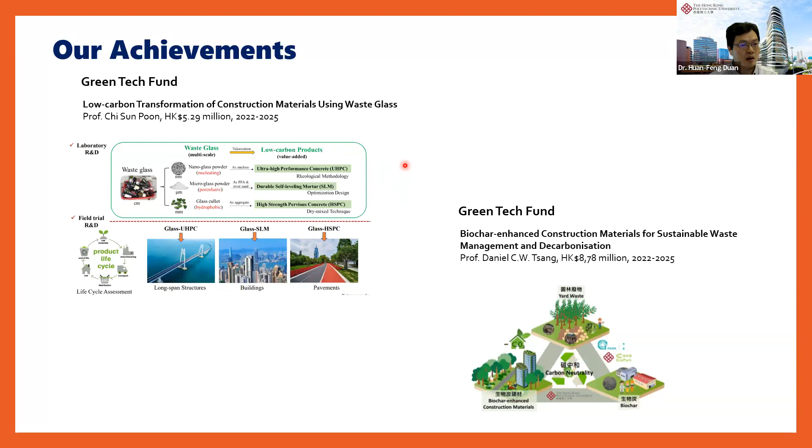We have a Green Tech Fund from the EPD to address low carbon and sustainable waste management, and also other research schemes like the model testing facility for debris flows in Hong Kong, which has become very critical due to climate change and rainfall, and the impact fund from the RGC to address drainage or material problems in pavements and other aspects.

We have different programs, like the undergraduate programs in civil engineering and sustainable development, as well as postgraduate programs and research postgraduate programs at master's or PhD levels.

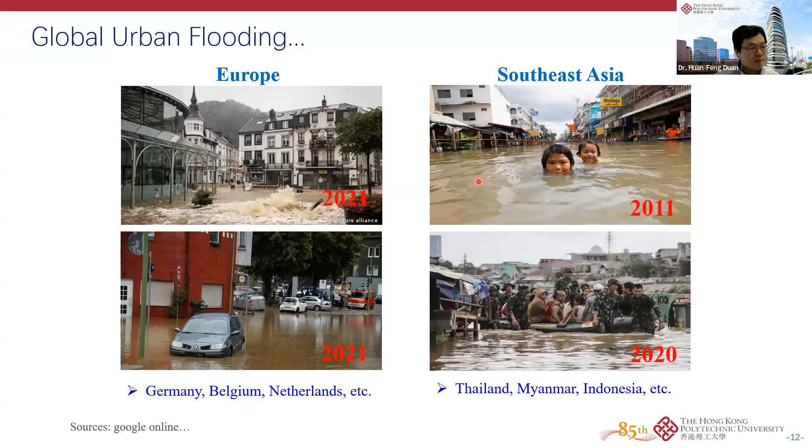And if you look at mainland China, this year Beijing encountered huge flooding events due to very heavy rainfall. It caused a lot of problems, including deaths and other problems.

Two years ago, there were serious flooding events in Zhengzhou, China. Around 400 people were dead or missing in these events, and of course there was a lot of damage, including economic and other social damage in this city.

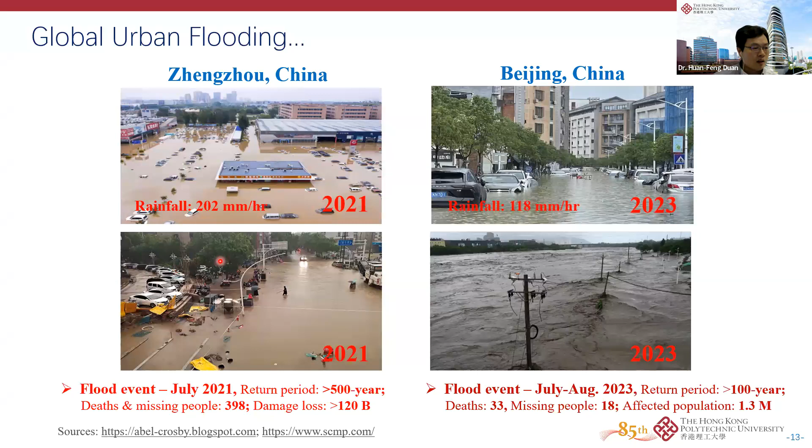Now let's see this problem in Hong Kong. Some months ago, we encountered some huge rainfall due to typhoons, which caused problems. Look at this, which occurred in September this year, just last month. We can see the rainfall distribution in that event.

It has some very important observations: the peak rainfall reached 158 millimeters per hour, which broke a lot of records from the past 100 or 50 years, and it's equivalent to a 500-year return period of rainfall intensity according to the current estimation from the HKO, the Hong Kong Observatory.

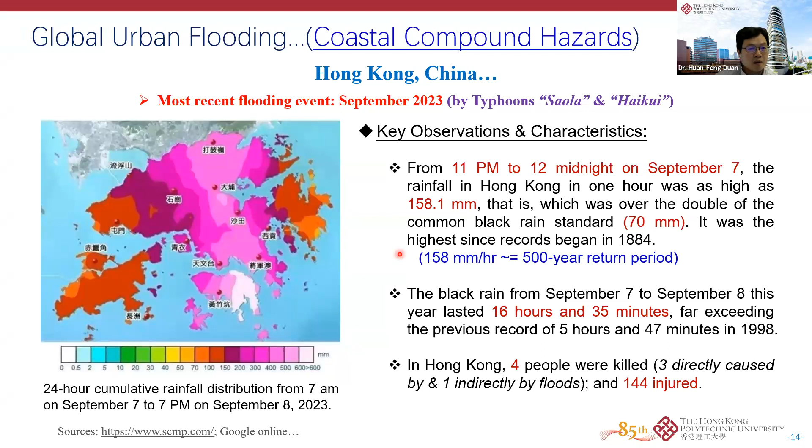And there were also a lot of problems. I believe many of you already observed that in Hong Kong, like in the pictures shown here. I'm sure you noticed or even experienced these problems in recent months. And of course, we have to propose something to solve the problems.

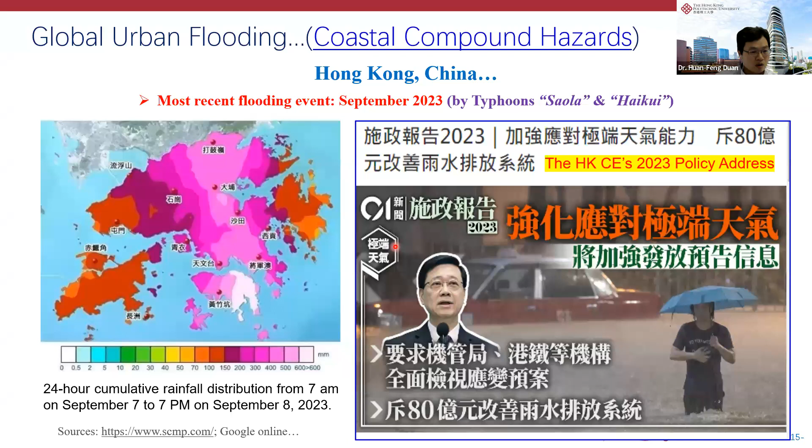Just today, I'm sure you noticed the Hong Kong Chief Executive's policy address this year already mentioned this problem, trying to improve the stormwater drainage system so as to reduce the risk and damage from extreme weather, especially due to long-term climate change. So this is the background of this topic. It has become very important and urgent for many different cities, including Hong Kong.

So now let's see the challenges of these problems through engineering and scientific research. In engineering, if we're going to construct measures or facilities to address the problem, we have to consider many aspects like cost effectiveness, the feasibility of the engineering, as well as the complexity. This is a very common way to consider it.

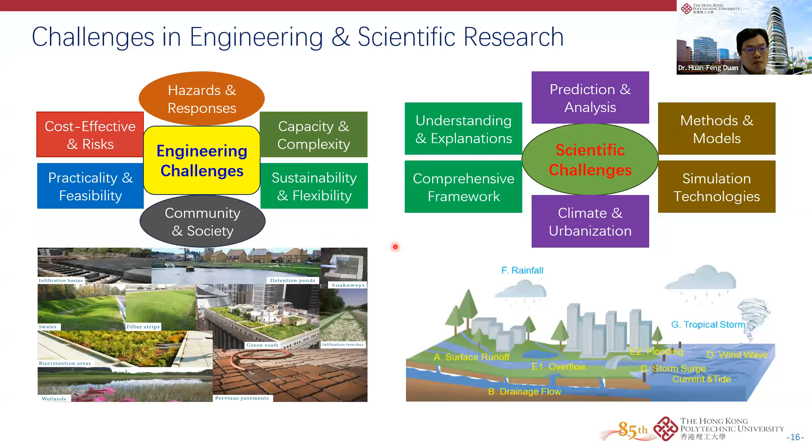From the research perspective, we have to understand the mechanism behind any engineering project and these extreme events, and propose a suitable and comprehensive framework to solve the problems. Especially, we have to consider long-term climate change and urbanization in different cities, and develop relevant tools like models or methods, including simulation technologies.

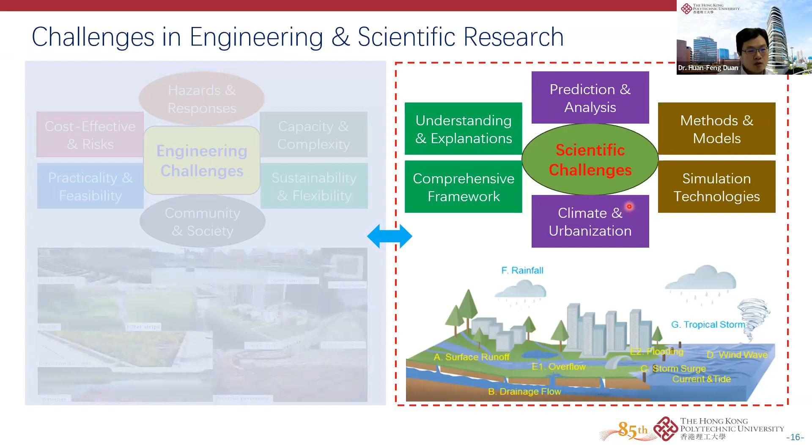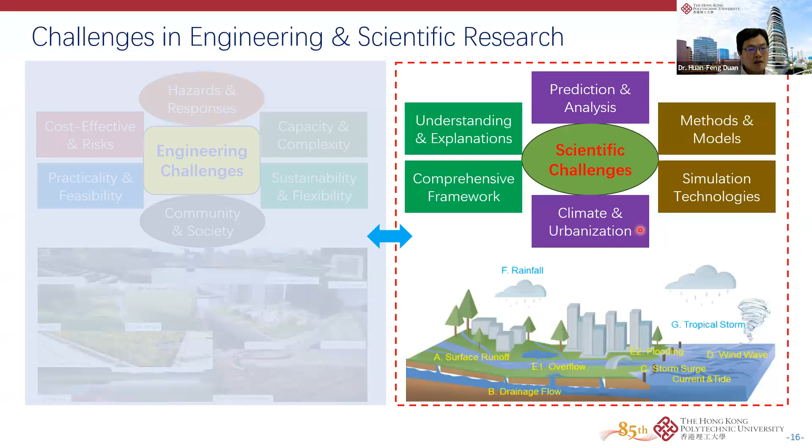According to the research in our group, we have tried to address some of the scientific challenges on this topic, including models and methods, as well as frameworks to understand and simulate the rainfall and drainage processes.

The urban drainage system, particularly the stormwater drainage system in coastal cities like Hong Kong, can be a very complex system, whether in terms of disciplines, theories, or the system itself. There can be multiple system components in this framework. It involves multidisciplinary theories like hydraulics and hydrology, and fluid mechanics knowledge to understand flow characteristics and interaction with the structures in the system or the soil itself.

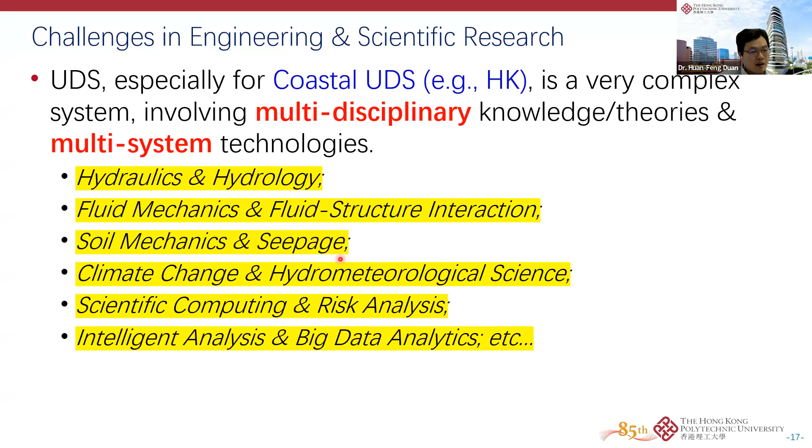At the same time, we have to consider influencing factors like the climate and weather, and propose scientific computing technology that can be used in this field. And finally, we combine advanced data analysis methods like AI or big data to propose an intelligent framework to solve the problems.

Of course, the stormwater drainage system is not only about drainage channels. It can consist of different subsystems like surface runoff, the pipe system or open channel system, the river system, as well as the coastal water system if we are a coastal city. So it can be a very complex system when addressing flooding issues in coastal cities.

So now in this presentation, I'm going to introduce some of the knowledge that will be used to explain some mechanisms of the floodings or even more extreme events during the rainfall process. And then, of course, there are many basic knowledge like the basic hydraulics, including the mass conservation, momentum equations and energy equations and so on.

But in addition to that, we have to consider more extreme cases like the superposition of different phenomena that can occur in the drainage system. It's usually one of the key reasons causing the damage to the system.

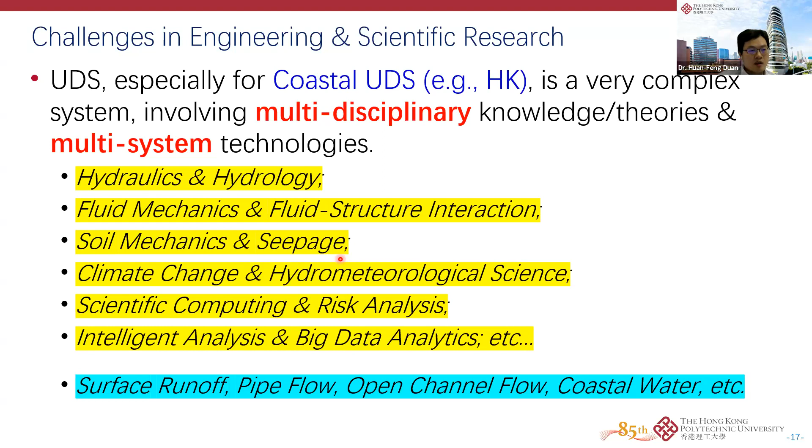So the first part I'm going to introduce is about the multi-phase flows in drainage pipes or systems, because during the very fast runoff or surface drainage, the water goes into the drainage system from the rainfall collection system, and then it may cause some multiple phase flow, like the air can be trapped or taken into the system. So the air, in forms of bubbles or cavities or any other pockets, can be contained or maintained in the drainage system and cause some severe problems under specific conditions.

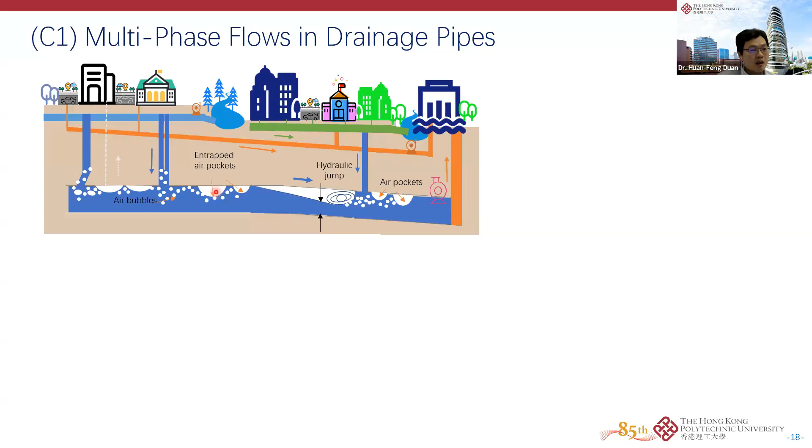Like when we drain the water from the surface into the vertical collection pipe and then to the downstream with different slopes, the air trapped initially in the system can exist in different forms, and also where it stays could be very different, like the air pockets, some maybe in the free surface, some maybe in the pressurized, and so on. So this could form very important and also difficult problems from the scientific computing perspective: the air-water flows under this unsteady state.

So in this regard, the form of this trapped air in the pipe section could be divided into different types for the investigation. There are different properties or dynamics, like the bubble flow, plug flow, or slug flow, as well as other different forms. For each of these types, the treatments from the simulation or from the physics could be different when you're going to simulate or solve this flow in the system.

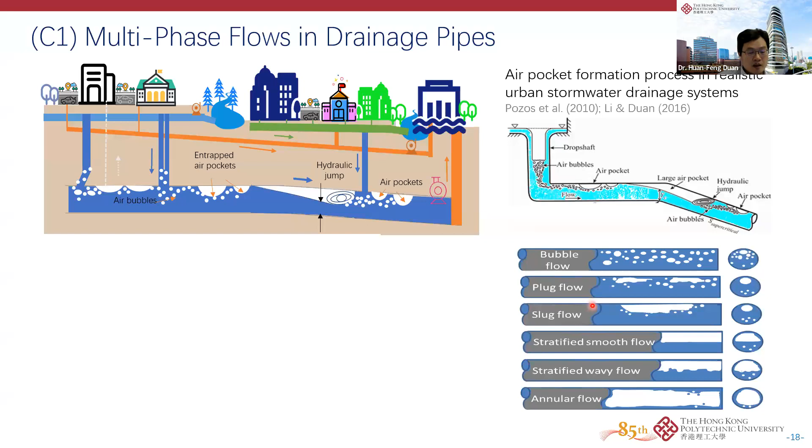Different methods should be used, because some of the methods may be applicable to solve the bubble flow, because the bubble flow could be relatively uniformly distributed, while for the slug flow, relatively separated regions in the pipe can be observed, and then you have to treat the interface clearly.

So in this regard, due to this air trapping in the drainage system, it can induce some problems, including drainage capacity reduction, as well as some extreme pressure change. So the pressure change, like the sudden increase of pressure, can cause some problems, like shown in these figures.

As an example, in this kind of drainage system, the water comes out from the manhole due to the high pressure. It could be the pressure of the flow itself, but it may also be due to the air and water interaction, especially like in the first figure. The pressure could attain over 30 meters of head. So this air inside the drainage pipe can cause very serious problems.

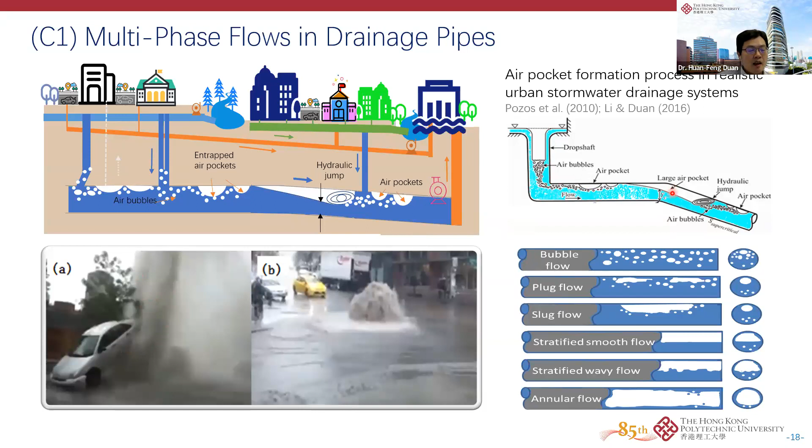So how to address this problem, how to predict, or how to model the system before we can have a very good or better design of the system? So we have done some experiments in the lab so as to understand how the air propagates under these pressurized conditions, especially under the sudden drainage or the sudden inflows from the upstream because of the runoff of

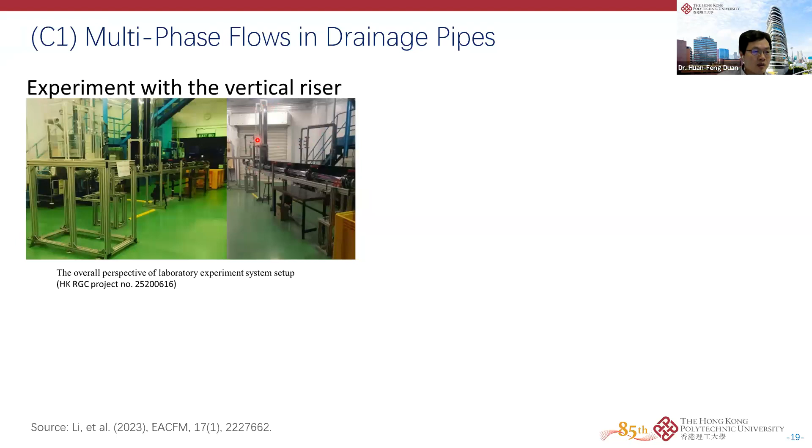the heavy rainfall. We have done different experiments in the lab so as to understand how the air pockets propagate, pressurize, or are released from the vertical risers, which are used to mimic manholes in the drainage system. So like shown here, with different sizes of the risers.

And then, of course, after these experiments, we have to further simulate this process so as to know more details, because experiments can show you some basic phenomena, and you can measure values at some typical locations, but you cannot measure all the locations or the overall picture of the distributions of the pressure and the velocities. So modeling is another useful and important method to capture the whole process of the drainage.

So we propose two-phase models so as to capture how the air pockets propagate under the different conditions. In the model, we can set up different boundary or initial conditions so that we can understand exactly the process or mechanisms in the system.

However, if you're going to use the compressible model, it seems that from the physics, it may be more reasonable. But if you're going to deal with the interface, it causes a very unstable state due to the numerical oscillations. Not exactly the physical oscillation, but numerical oscillation because of the compressibility of the air inside this pipe. So it can cause an even larger difference between the experiments and the models.

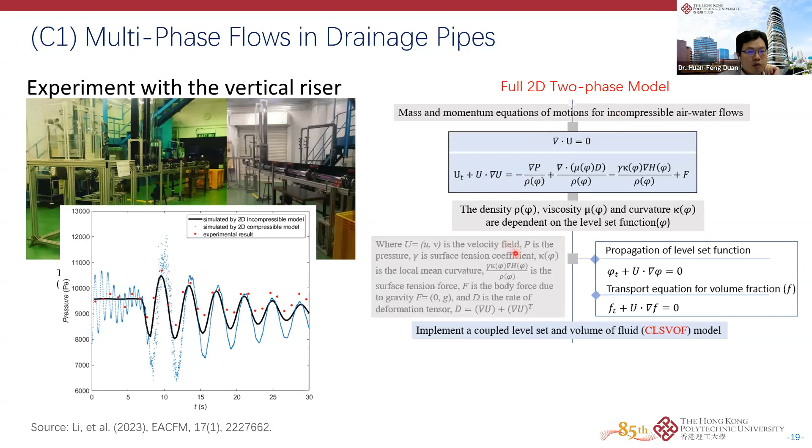So according to the proposed model we have in this work, we can actually understand some mechanism or the phenomenon of why this kind of air entrapped in the pipe can cause so much damage in the system. This can be analyzed through the numerical results from an energy perspective. We can easily understand through the simulation that in the whole system, the energy can change or be transformed among different forms like kinetic energy or potential energy. They can exchange with each other in the system due to these oscillations.

And finally, we can understand that during these air-water flows, there is huge energy accumulated under the compressed state of the air, especially when it comes to any release or releasing risers, this energy will be released to form this very huge water column like we have observed in the former slides. Okay, so it caused a lot of damage in the system. So this is the first part we have done for understanding the air-water flow, the role of the air inside the pipe. It can cause very huge energy variations during the draining process.

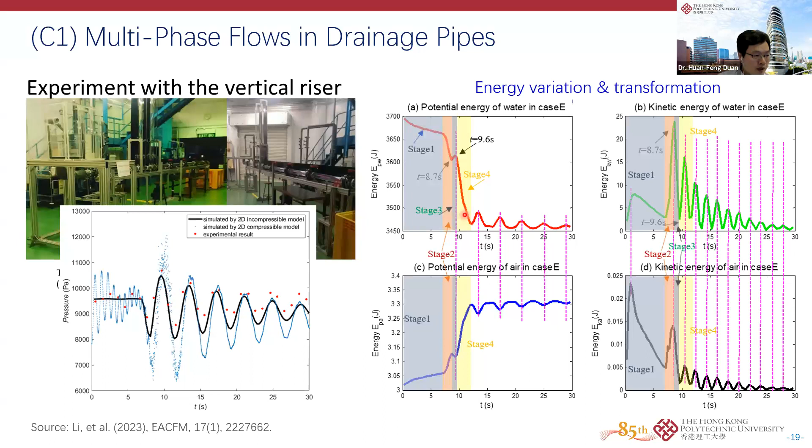And then another one is, when we are concerning the drainage in the urban system, it also concerns the channels' capacity for addressing the flooding problems. However, we have proposed a lot of developments of sustainable and renewable systems. So including the drainage channels, we usually build the channels with plants or aquatic vegetation. In this regard, it can maintain the ecosystems, but at the same time, it can cause some other problems from the hydraulic perspective, like the reduction of the drainage capacity or even sediment problems or other hydraulic problems like turbulence and so on.

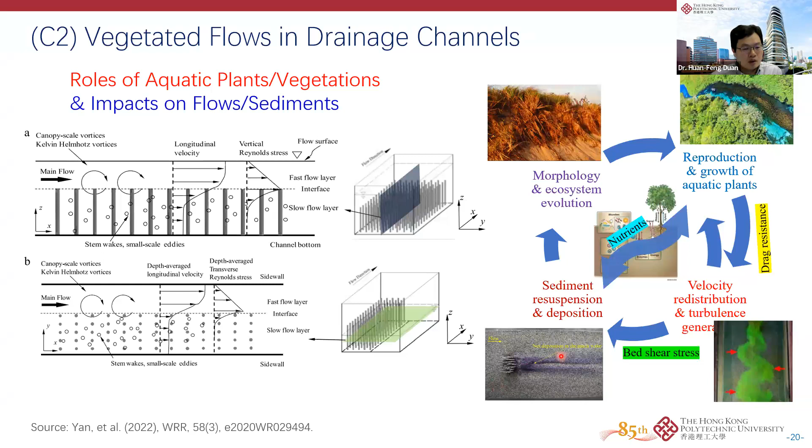So to understand or investigate this kind of vegetative flows in the drainage channels also becomes very important for the whole drainage process in urban drainage systems, because in many urban drainage systems, some parts consist of this type of vegetated channel. If you look at the vegetation's role in the drainage channels, it may be submerged in the water or emergent from the water, or partially or fully occupying the channels. So it may cause different interactions between the flows and the vegetated parts. So how do we understand, from the flow mechanics point of view, how this vegetation blocks the flow capacity or changes the velocity in different parts of the system, especially causing sediment erosion or sedimentation problems in the channels.

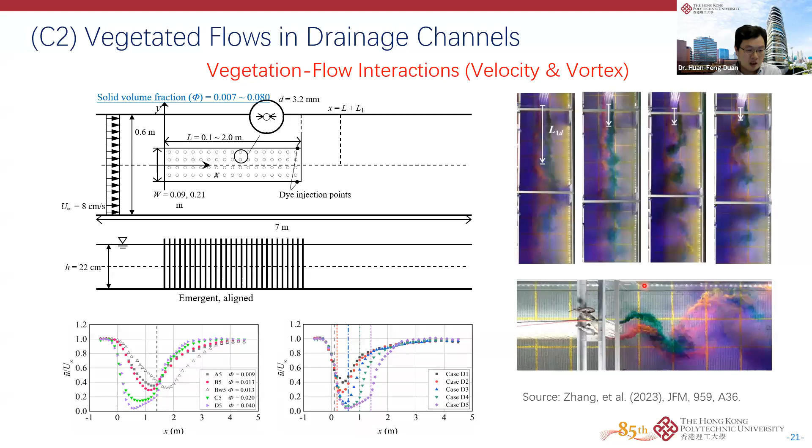So we have done experiments to explain the phenomena of the vegetated flows in the drainage channels, including how this kind of vortex is formed in the system, and also how it influences the flow velocities between the vegetated and non-vegetated parts. Actually, we found that there is some exchange of momentum between the vegetated part and the non-vegetated part, so that the flows in this kind of channel can be greatly affected in their distribution and also the energy loss. So we have measured different velocities to explain these oscillation flows and also the vortex formed in the channels.

And then also we found that there are some secondary circulations, and this kind of circulation flow is one of the main reasons to cause the morphology change of the channels, like the sediments or the erosion. As shown in this picture from the laboratory, in the vegetated part, it finally becomes more and more deposition, an increase of the bottom surface. While for the other parts, like the right hand side, the bottom has clearly been eroded significantly due to the circulation flows between the vegetated and the non-vegetated parts.

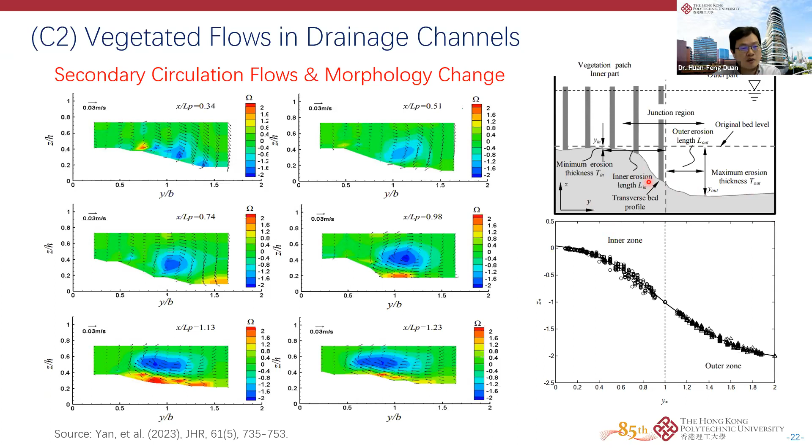So finally, we can formulate an equation to predict how this vegetated part can change the morphology or the distribution of the sediments in the channels. Of course, this change after a long time can also affect the drainage process as well as cause flooding, especially within the section of the vegetation patch. So this is the second aspect we have done in basic research to understand the flow processes and dynamics in the drainage channels.

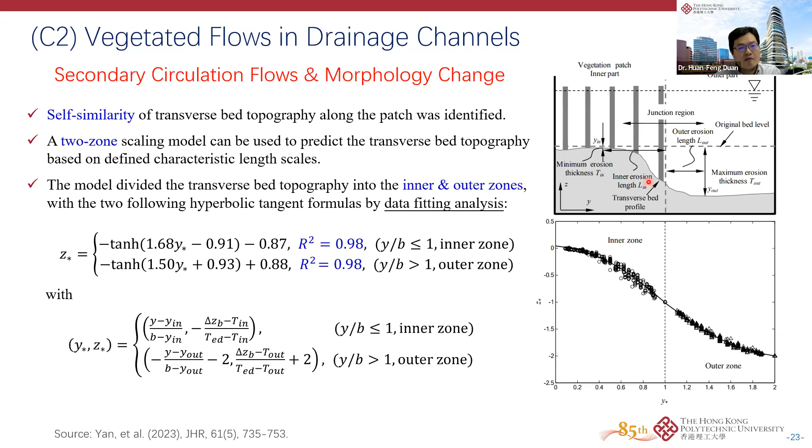So this is the equation, as I mentioned just now, proposed to predict the sediment change in the vegetated part, so that we can predict the morphology change of the channel bottoms or the bed morphologies along the channels if we're going to plant some vegetation or plants along the channels.

And now this is the first two parts. I just gave you a very simple introduction of some basic or fundamental research regarding the air-water flows and also the vegetated flow that may occur in the drainage process. So these are about this kind of very basic research. It could be a very small part of the whole urban drainage system, but it may be very important to the drainage or even the extreme phenomena we have observed.

The key findings from this basic research: the first one is that complex flow regions or phenomena, like the geysers or the air-water releasing flows in the drainage system, can be formed under specific conditions. Of course, this can cause some damage because of the release through the gate, through the risers or manholes.

And then the vegetation can reduce the drainage capacity in different ways. It can cause velocity change along the vegetated part as well as sedimentation problems, especially the erosion of the channel bottoms due to the circulation flows formed between the vegetated and non-vegetated parts in the channels.

So finally, we know that the nature-based solution becomes very popular, but we have to consider the influence of these different aspects on the flow dynamics or the whole drainage problems, in terms of ecohydraulics knowledge. If you would like to know more details, like how the circulation flows are formed under specific conditions, or how the flow affects the sediments along the channels with vegetation, you can refer to the papers we have published recently.

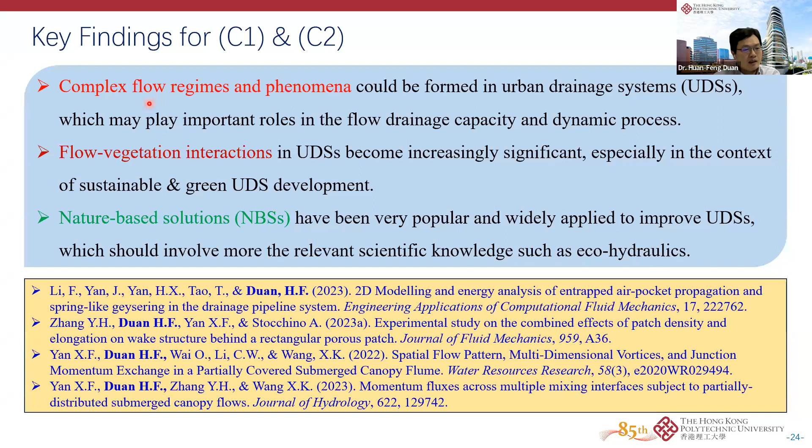And then, we know that these different factors like the air or vegetation can change or affect the efficiency of the drainage, but how do we design exactly the system to avoid floodings? So the third part is about the green-gray infrastructure for low impact development. One of the keywords in my topic is LID, low impact development, in the urban drainage system. It can also refer to sponge city or other sustainable drainage systems in different regions. Green-gray infrastructure actually commonly exists in different cities.

In Hong Kong, we have different gray infrastructures to store the stormwater during very extreme rainfall events, like detention tanks under the soccer field or other places, such as the Happy Valley storage tank. And then we also have deep tunnels to divert the flows under different conditions.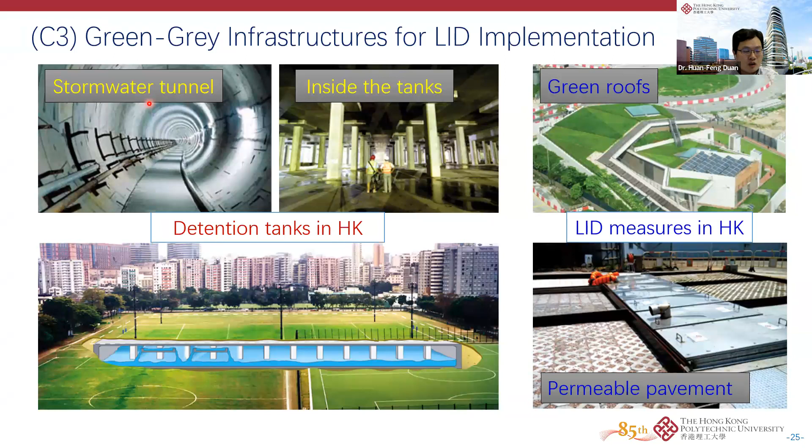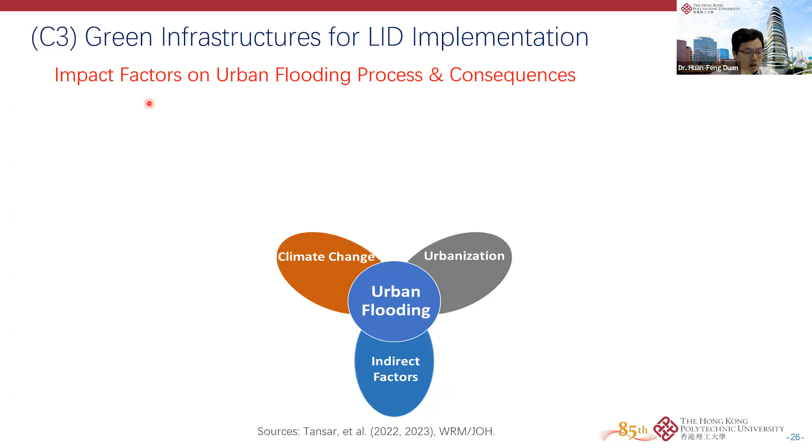So how to better design this green-gray infrastructure for LID implementation in the urban drainage system? This is the topic for this part. The impact factors on the urban drainage system mainly consist of these aspects. One is climate change. For example, we have different rainfalls due to different climate or weather conditions, like the return periods, the intensity or the peak flows for each of the events.

And then there is urbanization, because urbanization can change the land use and other aspects. It can cause the runoff or drainage process to become very different from the original design plans, because the stormwater system is usually designed and constructed before the urbanization process. And also, the socioeconomic development of the cities, like GDP development, can actually influence the climate or regional weather.

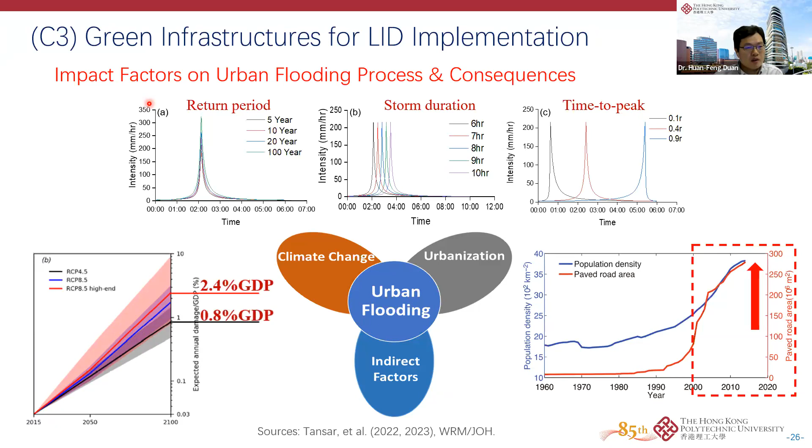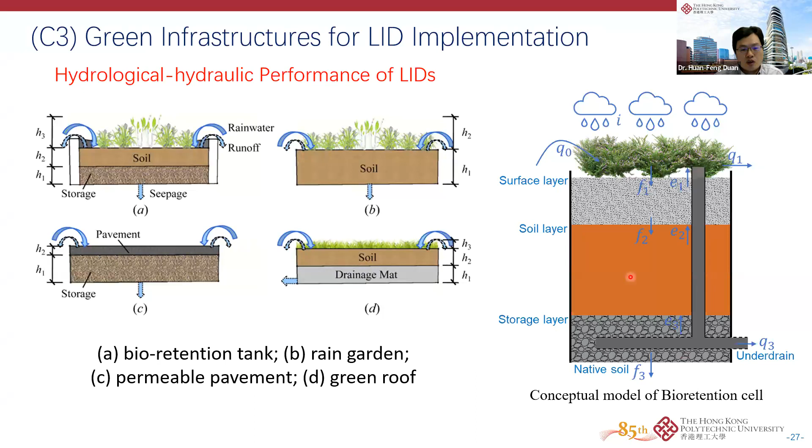So then the surface flow or runoff peaks will be reduced due to the filtration or retention effects of this cell. And finally, the water stored in this cell must also be drained into the systems. But with these retention effects, the peak flow originally collected from the surface will be reduced, but of course the total volume is conserved. It cannot be reduced, the quantities of these waters.

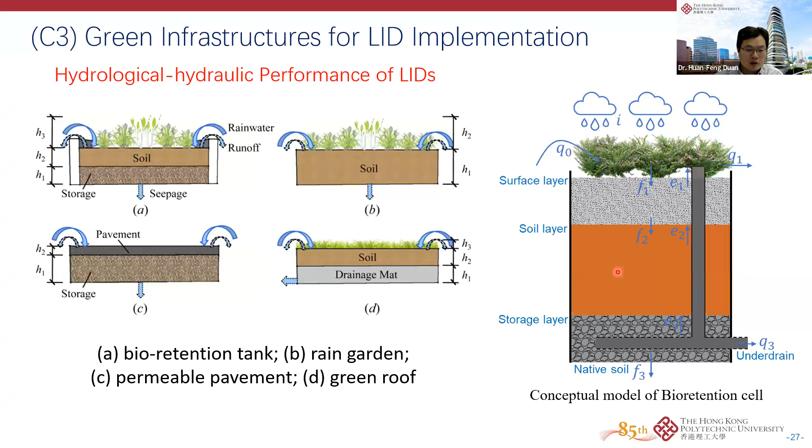And then if we're going to model this system in the drainage process, we have to consider different layers. How does the flow pass through the different layers? And of course, the main principle used to design or model this one is the conservation of mass, because the total mass collected from the rainfall is conserved, including the retention part and also the runoff parts.

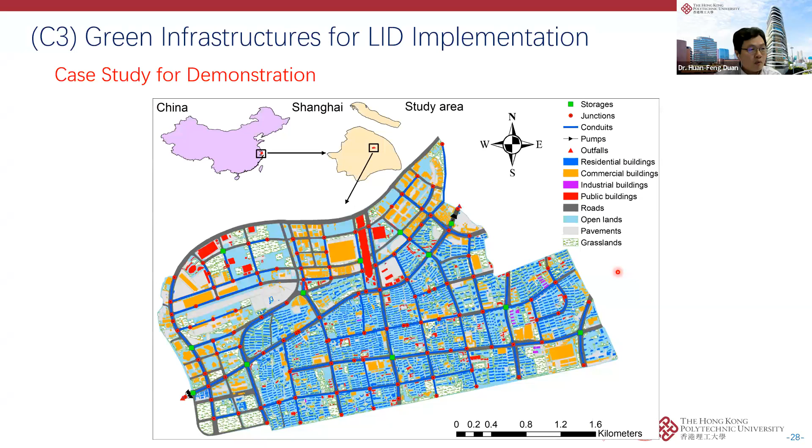And then for a case study, because if we're going to investigate the effect, we have to take one of the cases to study their exact functions and also the effects on the rainfall runoffs and the peak flows. So we take some of the regions like this, a real case from mainland China, and we can use this case to study different types of LID measures, like the green roof or the bioretention cells or other measures. So anyway, this is just our system taken as the example. We can take any other cities or regions for the example, but the framework we developed here should be the same.

So if we apply these different kinds of LID or green infrastructures, we can find out different results. For example, through these simulations, we can find out each of the single measures or single green infrastructures has different effects on the reduction of flood volume. So for example, we take these 4 types of measures. We can find out under different conditions, their reduction effect is also very different.

For example, for the relatively small rainfall events, like the 3-year return period rainfall intensity, we can find out the reduction effect could attain 70–80%. For example, if we place LID practice with 40% here, we take this as the example, it can attain 75% reduction of the flood volume, which could be very significant to the flooding mitigation effects. However, if we compare this with the 100-year rainfall events, still taking the 40% for the comparison, we find out the reduction effect becomes much smaller than the former case.

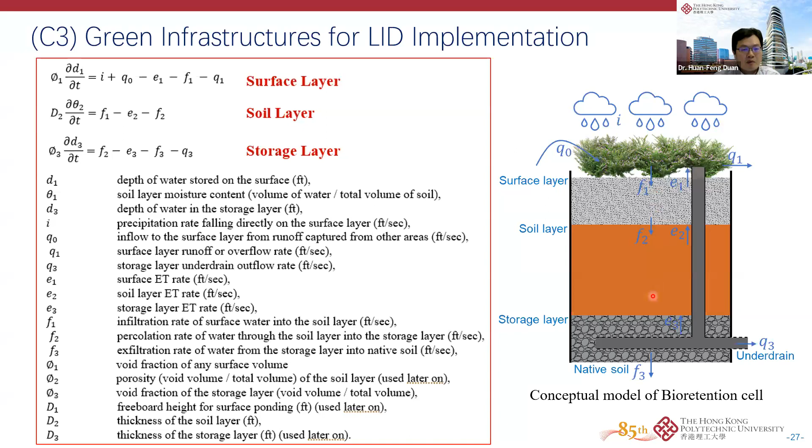So this clearly demonstrates that this kind of single green infrastructure can reduce the flooding effects, but it mainly functions for relatively small rainfall events. For the very serious or extreme rainfall events, its reduction effect becomes much smaller. That's because of the configuration of each green infrastructure, like this bioretention cell. Its volume could be relatively small, and due to these different layers, its flowing process becomes relatively slow. So for a relatively small rainfall event, it can store the water and reduce the flooding volume greatly.

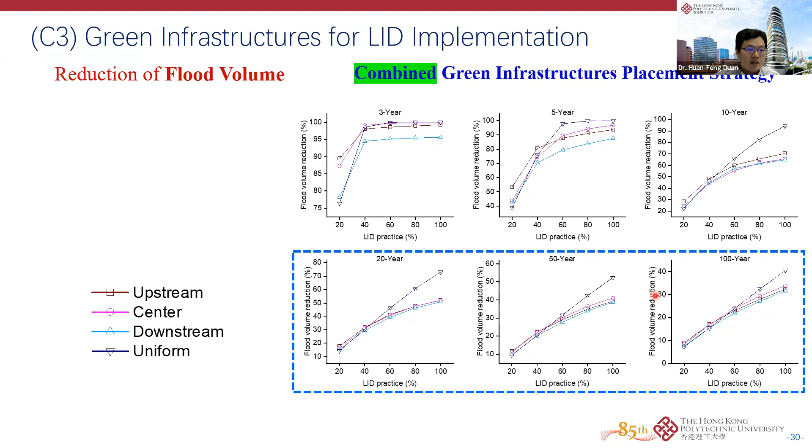But for the very extreme events, because of very huge peak flows, the stored volume compared to the total volume could be relatively small. So this kind of single green infrastructure placement strategy could be more effective for the common or relatively small rainfall events rather than the very extreme cases. Now, if we consider combined, for example, we put all these four types of measures or infrastructure together to understand whether this combined strategy is more effective or not.

Then, through this case study, we can find out that even for different distributions of the LID measures, the reduction effect also has similar trends to the former single green infrastructures. That is, the flooding reduction effectiveness is more significant for relatively small or mild rainfall events than the very extreme cases. However, if we consider the different distribution, for example, we put all these LID measures relatively upstream of the drainage system rather than downstream, or uniformly distributed along the whole system, then we can find out the uniform distribution's effect becomes even larger than the other cases.

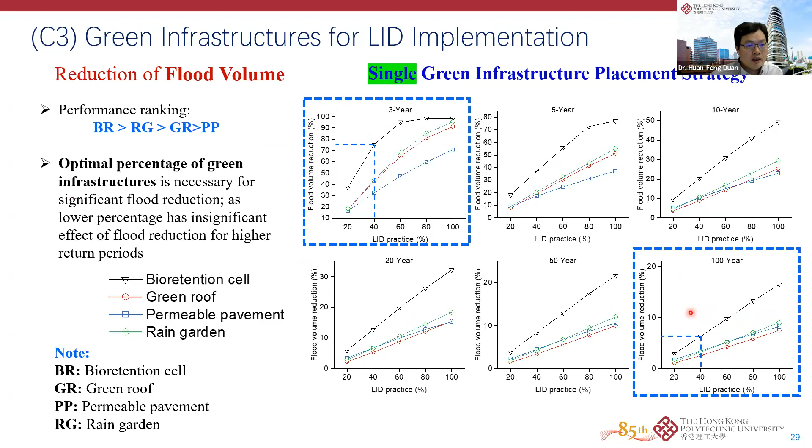So we can find out for different combinations or different rainfall cases, the effects become slightly different. But overall, compared with the former case, the single green infrastructure cases, the difference becomes relatively smaller because each of these green infrastructures could be combined together. Finally, its reduction effect becomes more or less similar if we put different kinds of combinations into the system.

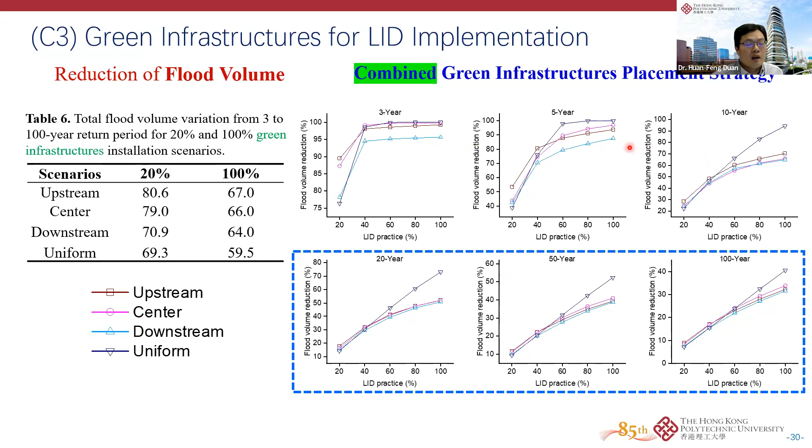But if we look at the cases for very extreme rainfall, we find that for LIDs combined along the channels uniformly, the reduction effect becomes even more than other cases. So at least for this case study, uniform distribution becomes more effective for the extreme case. But this may not be exactly the same for the common or relatively small rainfall cases.

Now, if we look at the reduction effect, we find the green infrastructure is mainly effective or valid for relatively small or mild rainfall events. Now, if we're going to have the extreme rainfall case, how do we address the problem?

So then we have to propose some other optimal systems, including both green infrastructure and gray infrastructure. Because gray infrastructure allows for larger storage capacities in the city, combining these two may have a more effective influence or reduction effect on the drainage system.

So this is the framework we developed for combining different types of measures or infrastructures, including green or gray infrastructures, so as to make the design optimal for different extreme rainfalls.

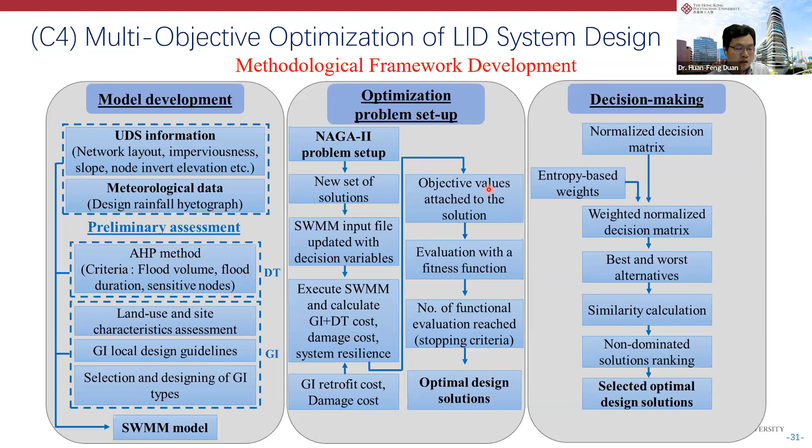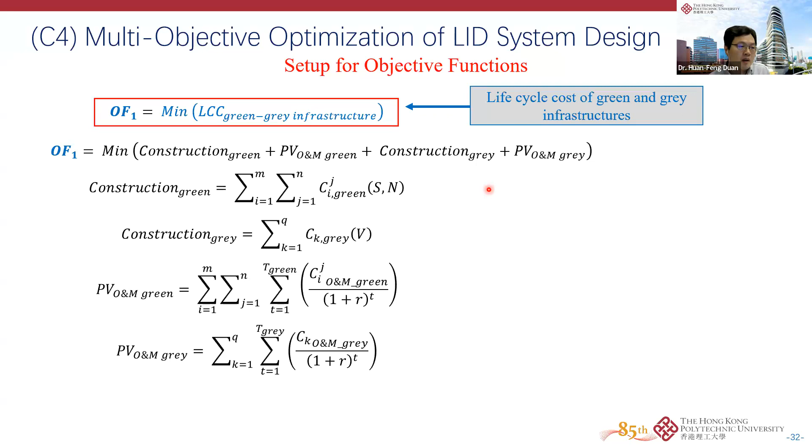Again, for the same case study, we designed different objectives for the optimization. We have to minimize the cost, because we cannot construct anything we want in our urban regions—sometimes constructing a gray detention tank may cost a lot, especially in downtown areas. Then we propose the second objective: to minimize the damage caused from flooding, so as to mitigate the flooding effects.

Finally, it's about resilience. If we cannot avoid or eliminate all the flooding problems, we have to make sure the system resilience becomes better than the original design. So these are the three objectives for the design of the LIDs, considering different functions of the LID measures, including green infrastructure and gray infrastructure, mainly the detention tank.

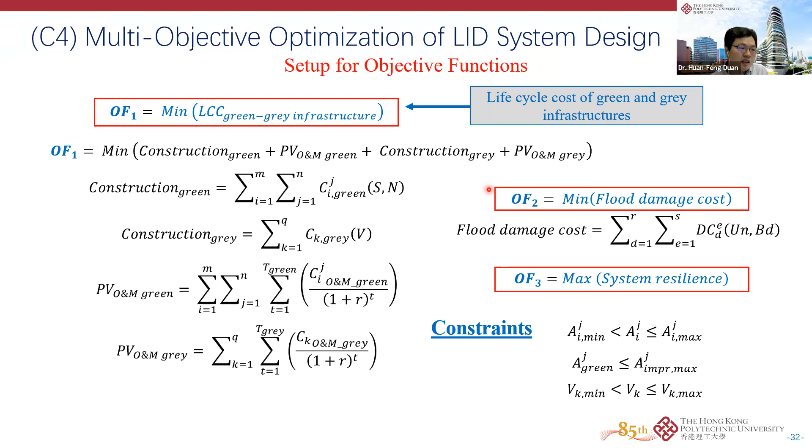So we have some constraints for different cases—for example, how large a detention tank we can construct, or what cost it has. And when we estimate the cost for the damage, we have to consider it in different ways, such as the construction of different gray infrastructure, or the damage caused by the flooding. This, of course, is case dependent.

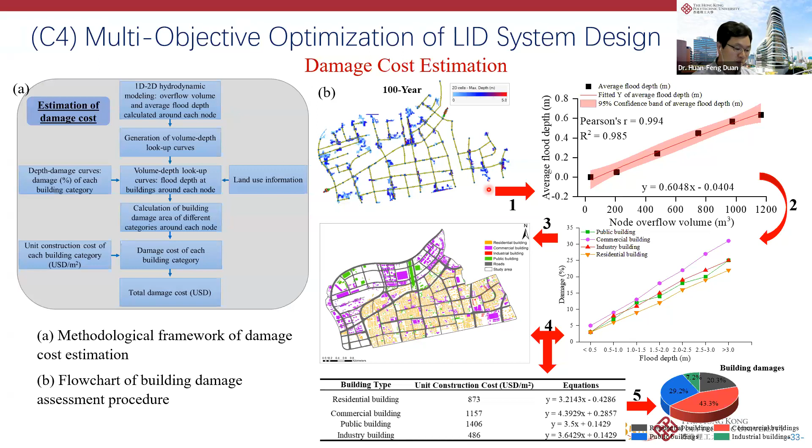For this case study, we have adopted local criteria for estimating the different damage costs. And of course, we don't only design for the current state—we have to estimate the cost for the long term, like different return periods, or the life cycle for the design.

For the resilience in the urban drainage system, we consider this index. One is due to the severity of the flooding problem in the system, like the duration as well as total volume and so on. And then there's the sustainability index, including the volume of infiltration or final storage in terms of total rainfalls and so on. So these are the different indices we assigned to evaluate the designed stormwater drainage system for given conditions.

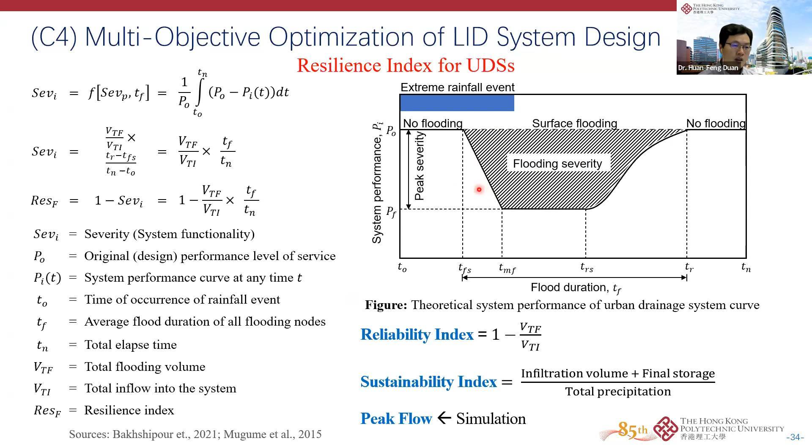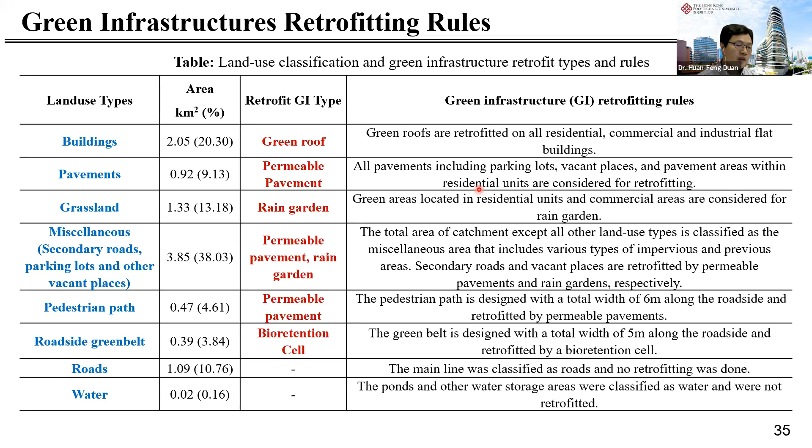Given conditions means different cities may have different index values. Then there are some other values for this case study, like land use—we must know the land use in the city so that we can design or plan different green infrastructure under the given constraints or limits. These are other conditions we have for this case study, which are, of course, case dependent.

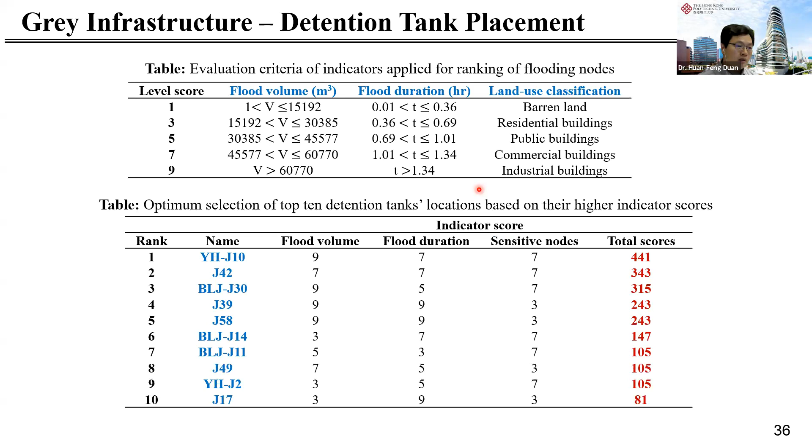Finally, we got the results to show you that if we apply the proposed framework, you can get different design schemes, especially based on local criteria like economic or cost estimation shown in the former slides. You can find optimal designs based on different criteria—for example, the selected optimal design shown in these figures gives you different dependencies of the scheme.

This is the best design under these scenarios. So for different scenarios, you may have different design schemes, but even for the same scenario, you can get different design schemes with different costs or other results. This can be useful for decision making based on the dependence of factors.

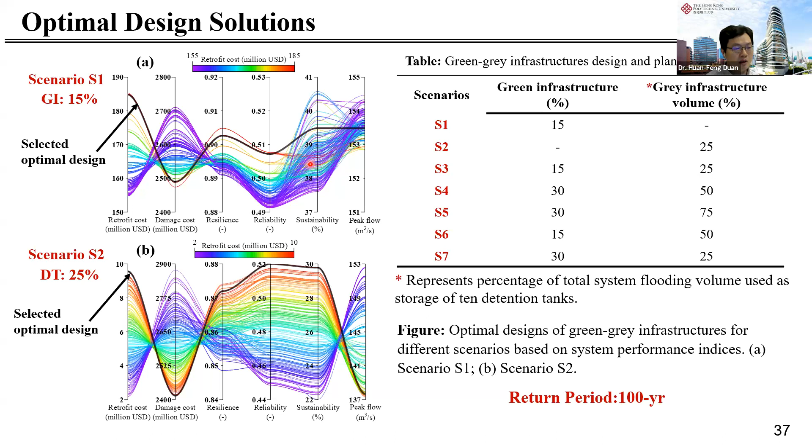Here are the selected results based on the different factors we proposed, like resilience, reliability, sustainability, and peak flows. We assign different strategies of weight and can get different scores. For example, ranking number one under this current condition is scenario 2 with this particular design.

For example, the cost could be relatively lower, but the flooding issues or outlet peak flow could be slightly higher than other schemes. If we focus more on reducing peak flows in the system, then we have to pay more cost initially. So this depends on the different decision policies in different cities, but this framework can provide choices for given conditions.

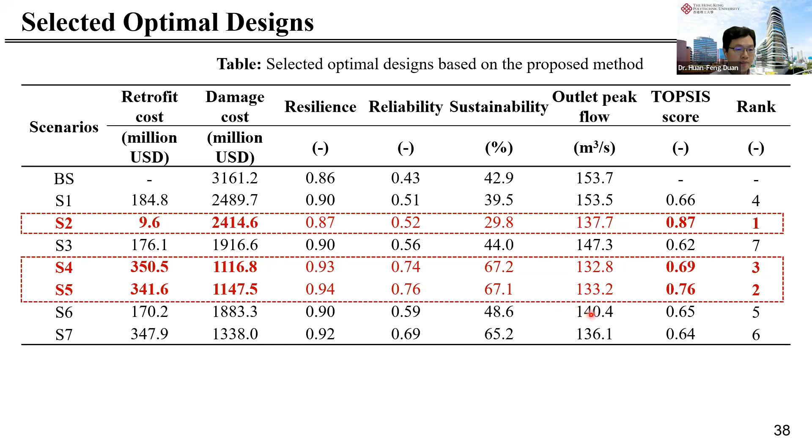This method can also show you different responses from the selected designs. For example, if you select scenario 2, you can find out the effect of different factors, like reliability or sustainability, and which one is more important or preferable in the system.

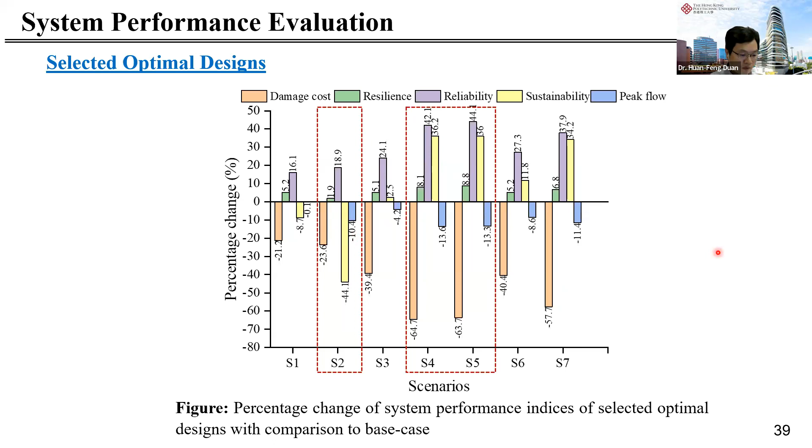Like scenario 4 and 5, the sustainability may be better than scenario 2. However, the total cost may be higher than scenario 2. So these are the different selections.

From this aspect, we can summarize some key findings. Gray infrastructure actually behaves more effectively than green infrastructure, especially under extreme rainfall. In other words, green infrastructure may be more effective or feasible for common and mild rainfall. A combined strategy may be the better way to consider different rainfall intensities and provide mitigation effects for flooding in the overall drainage system, especially when considering factors like climate change or other uncertainty problems, which will be introduced later.

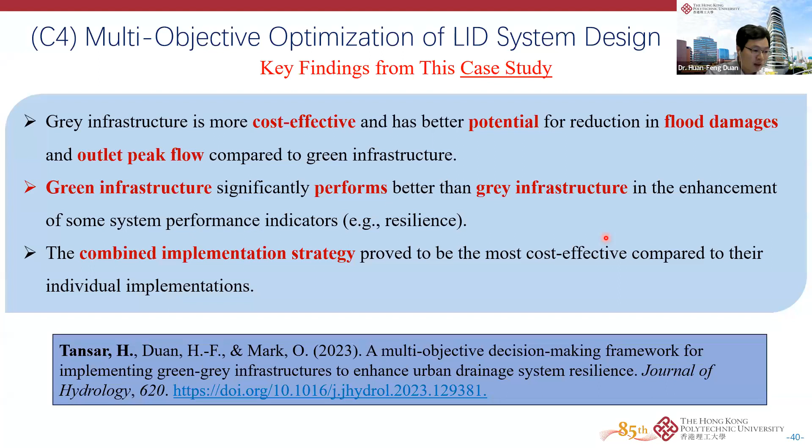The last part is climate change and uncertainties. We know climate change involves uncertainties in the long term, short term, or medium term. So how will this condition influence the design of these drainage systems? We propose a methodology framework to understand the optimal design under given conditions, including climate change and uncertainties in the system.

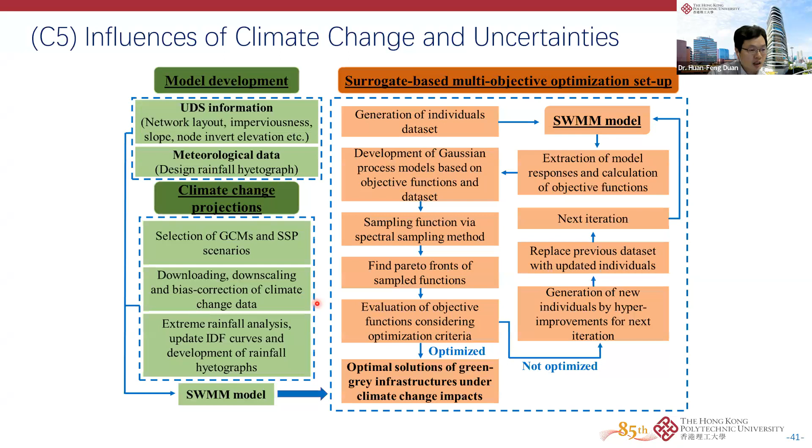Especially, we select different climate conditions to project rainfall conditions with uncertainties, so we can better understand the robust functions of the design schemes, or predict future scenarios in the system.

For example, we have adopted different general circulation models to model climate from different perspectives, like short term, long term, and medium term, and so on.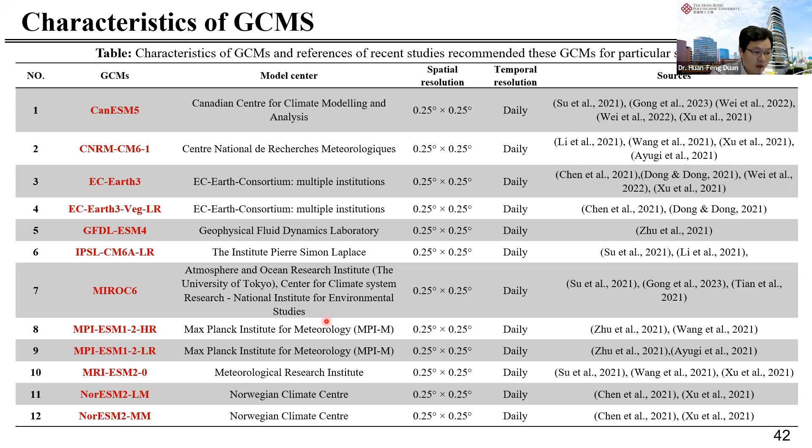Based on these models, we can predict rainfall at different stages, like the near future within 20 years, the mid future in another 40 years, or the far future to the end of this century, so we can predict rainfall with uncertainties. Based on different economic development predictions, we can have a range of rainfall intensities for different stages, so we can include this uncertainty or variation of climate-induced rainfall into our design framework.

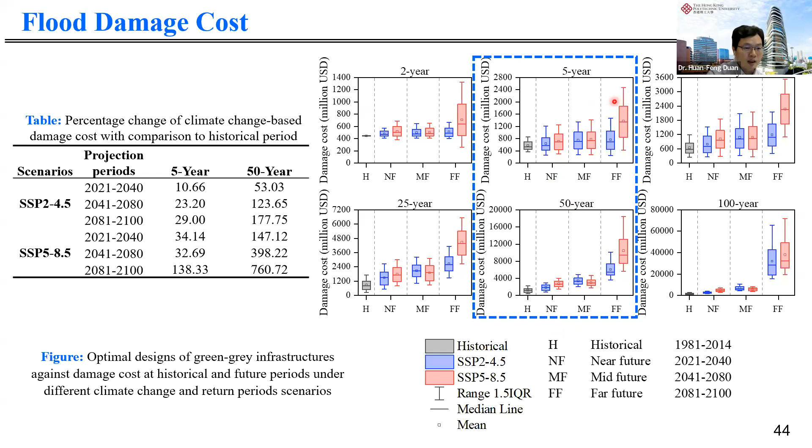We can find results based on the given conditions for the case study, including these uncertainties or variations of rainfall. Under the economic development scenario, we find that the percentage of damage cost in the design, including flooding, changes with different uncertainties, for example near future, middle future, and far future. We find that especially for the long term, it can produce relatively larger damage because of the increasing trend of rainfall effects, as well as a larger range of variation due to the uncertainties of those predictions.

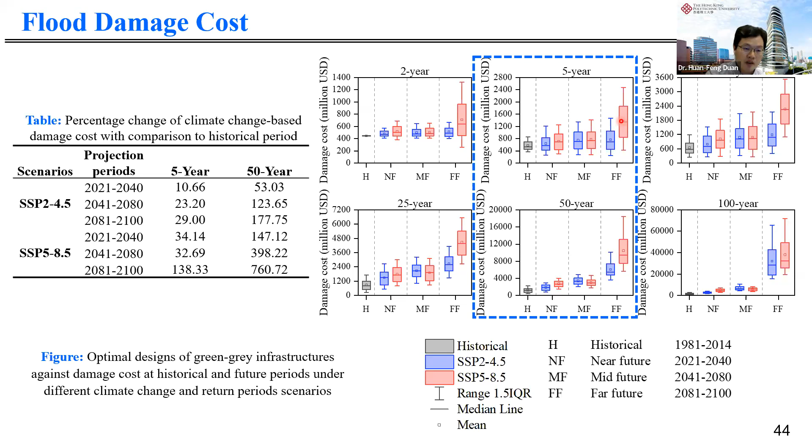And then for the other aspects like the resilience index, it could be a different or updated way, because if there is more rainfall in the future, the resilience of the current design of the urban drainage system becomes lower. So this is actually an downward trend which presents similar reasons from the former total flooding curve.

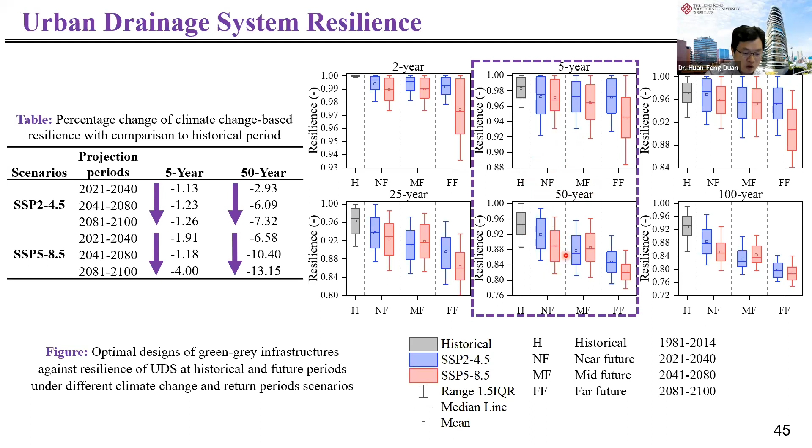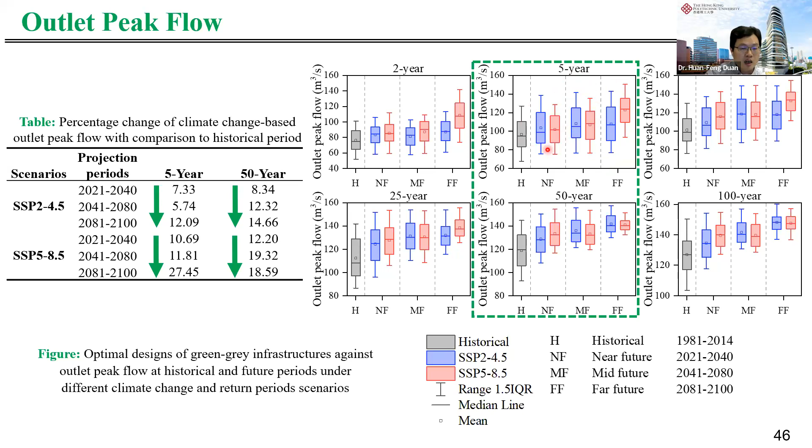So this is the key findings from this part: that we can include these different influence factors, including the long-term climate change with the uncertainties, into our design framework, so that we can achieve this optimal or optimized design under the given conditions. The numbers in this case study may not be valid for all cases, but the framework we designed could be useful to estimate the variations of the uncertainties, or exactly what the trend of the flooding issues is in the urban drainage systems.

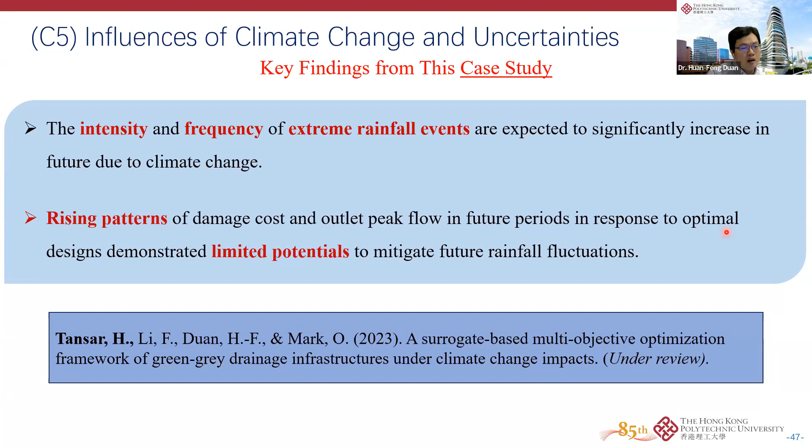So that's all 5 parts I would like to share with you in this presentation. I only briefly gave you the framework and final results for each, but did not explain exactly each of the steps used for the modeling or analysis. If you have interest, you can refer to the references or ask questions, and I will try my best to explain those processes.

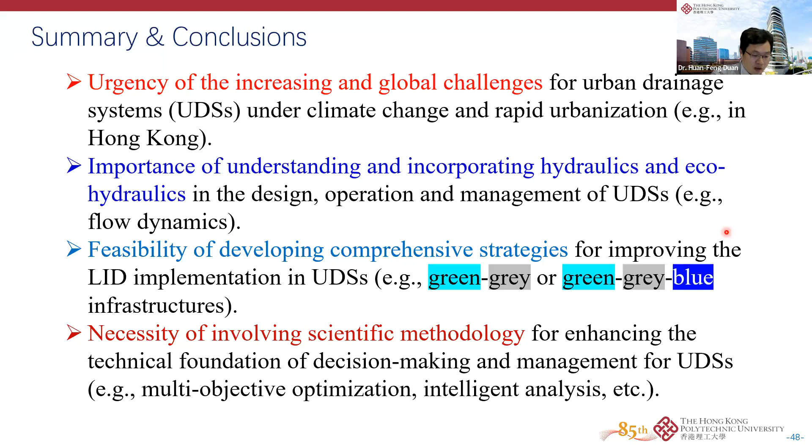So this finally is the reference we have mentioned for each part. If you have interest, you can refer to some of the references, or contact us for any details. All right, so actually this is all the content I would like to share.

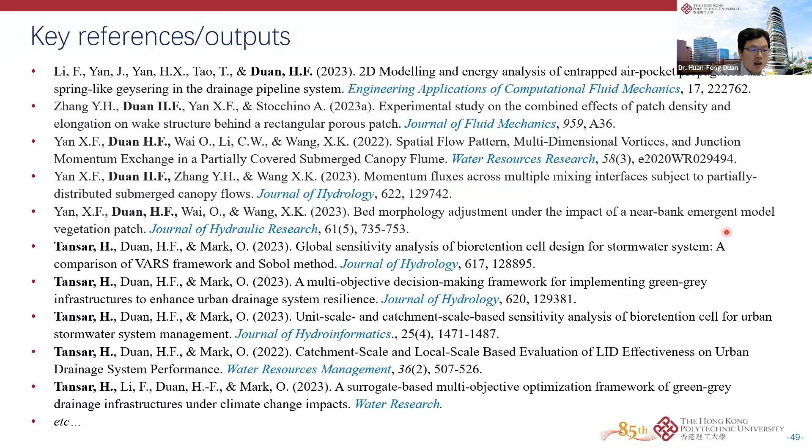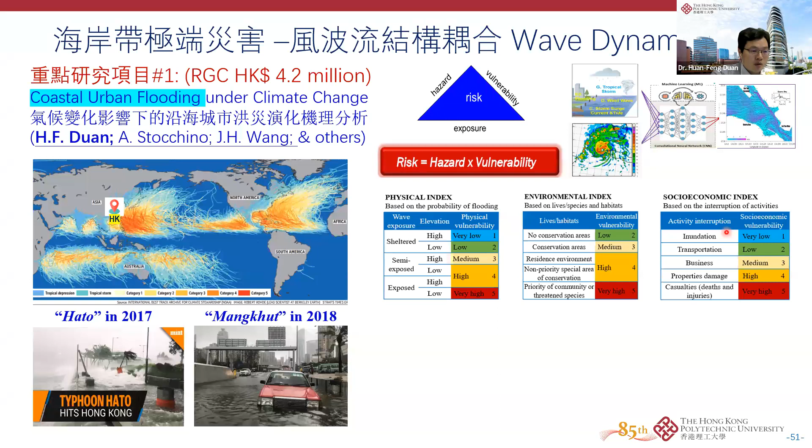But finally, I would like to show you some slides about ongoing projects relating to urban flooding. The first one is a project we currently have to investigate coastal urban flooding under climate change from different perspectives, like the different mechanisms of flooding caused by different factors. And then to propose an intelligent framework for predicting or forecasting risk in the system, combining storm surge and effects induced by typhoons or other extreme events. So finally, our target is to propose a framework to generate flooding maps in cities under specific conditions.

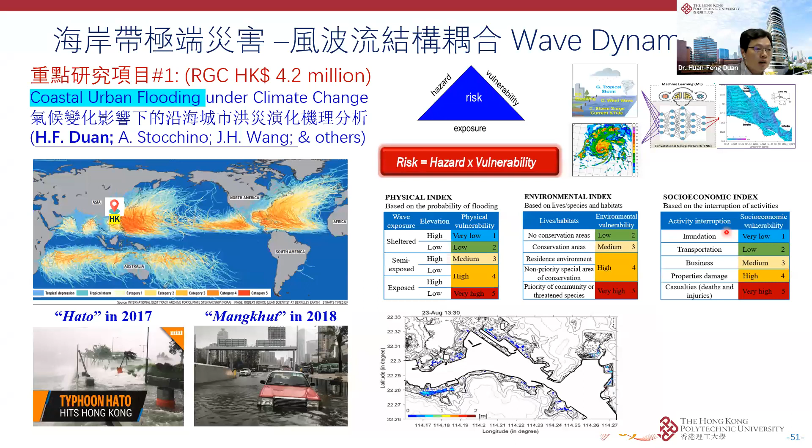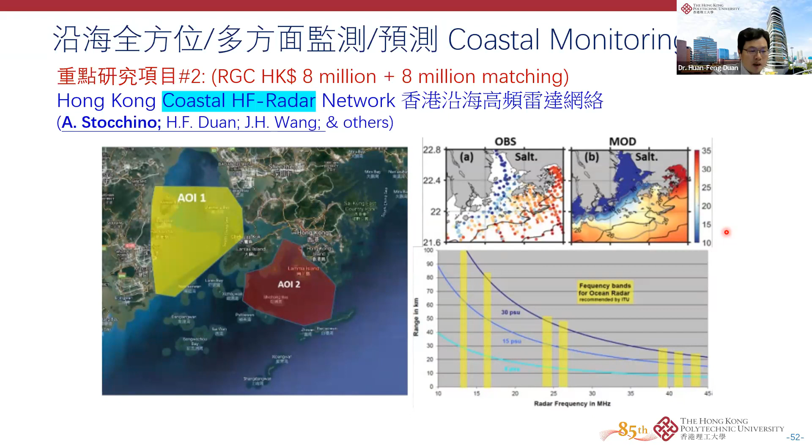And then the second one is a project to install a radar system so that we can monitor more data, including rainfall or extreme flooding problems. But of course this kind of radar network can be used to predict or monitor other effects, not only flooding. And finally, it's about tropical storm resilience systems in coastal cities, taking Hong Kong as an example, to understand how extreme events like typhoons or other tropical storms influence cities, like the infrastructure, high-rise buildings, and so on. So these are projects in our department.